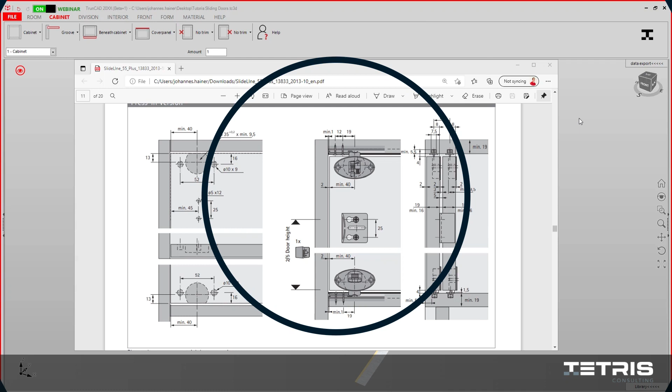Hello! In this tutorial we will create sliding door fittings for in-front mounting to use in TrunCAD.

Therefore, we go to Front, Sliding Door, and here to the Settings. Up in here, we enter our name.

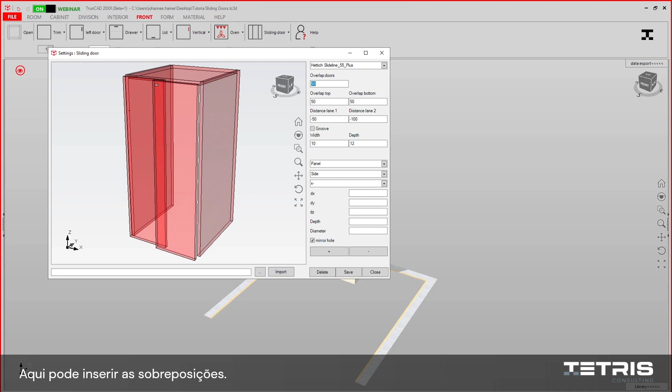Here you can set your middle overlap, overlap on the top and on the bottom. Here we have -4 on both of them.

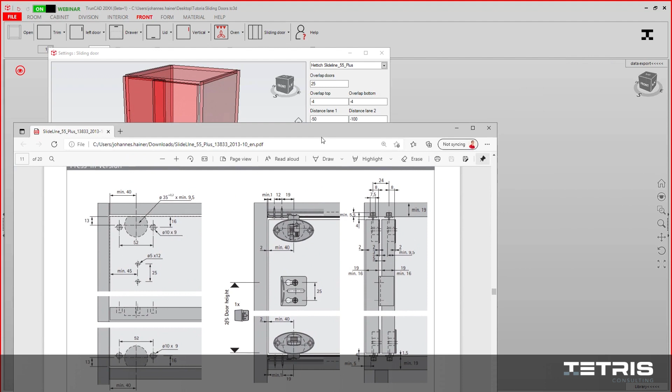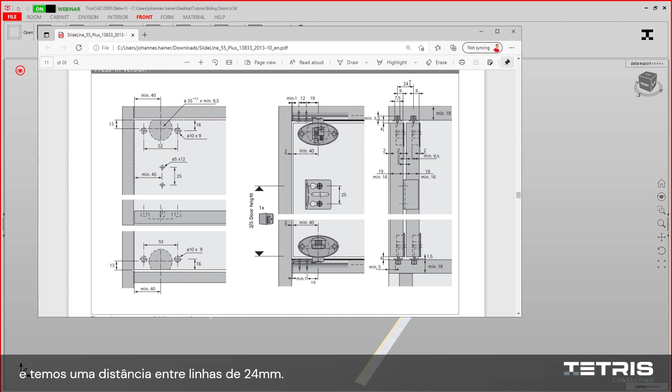Then we need the distances for the first and for the second lane. The first one has a distance of 5 mm, and we have a distance from one to the other lane of 24 mm. This means we have to enter 5 mm here and 29 mm here.

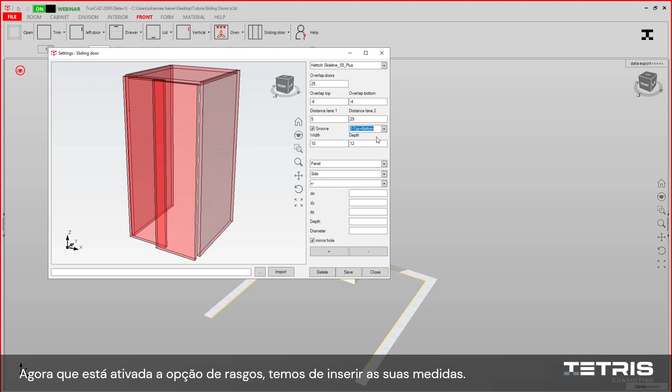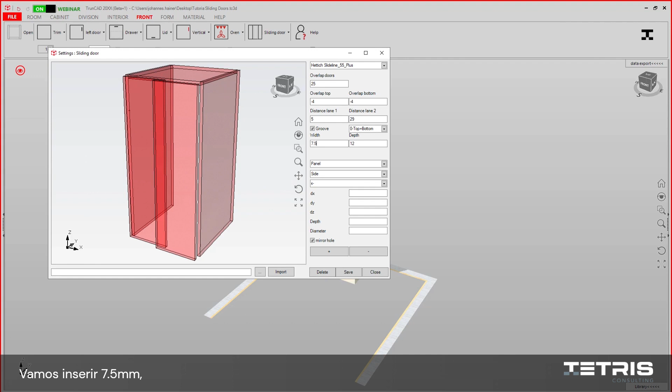Then we need to specify if we want grooves and where we want them. Now that we've activated our grooves, we need to set the measurements. Each groove has a width of 7.5 mm and a depth of minimal 5.5 mm. So we enter 7.5 and add a 0.2 mm clearance on the depth, which means 5.7 mm in depth, and then hit save.

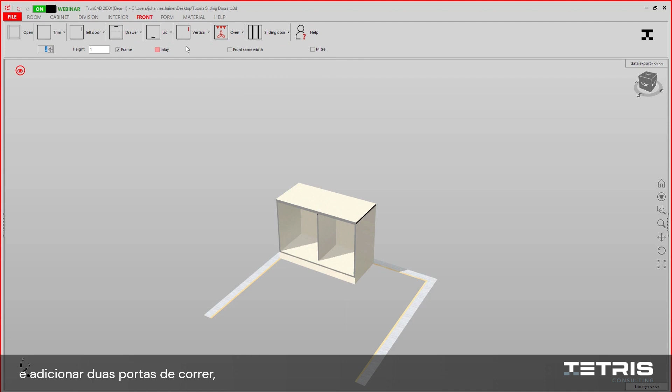If we now close it and add 2 sliding doors, we can now see that our grooves have been added.

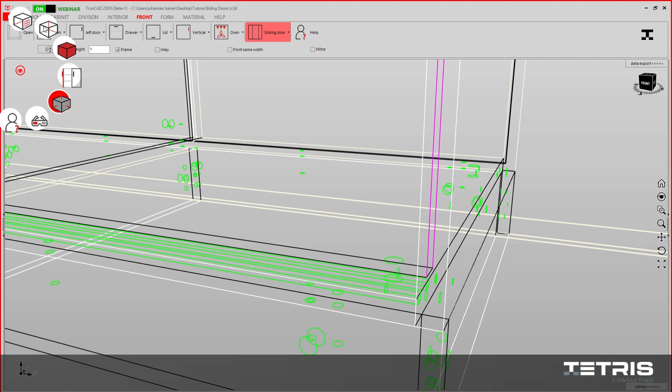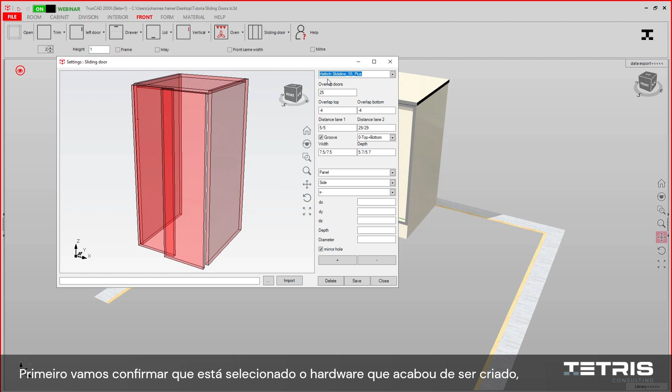Now let's get back to the boreholes. First we make sure to select the hardware we just created. Then we will take a look on the boreholes.

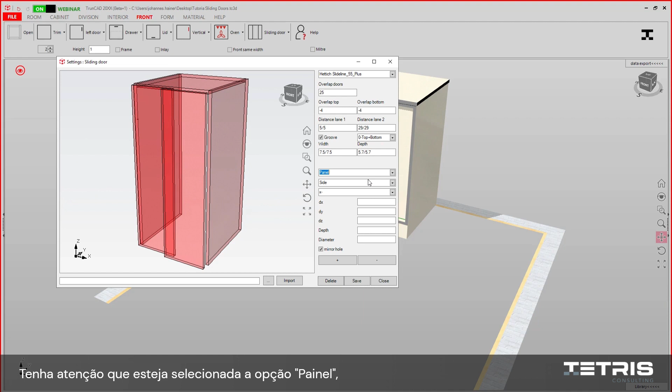For our first borehole, we need a distance in X direction of 40 mm, in Z direction of 13 mm. Make sure you have panel selected. Then we select a reference point here on the corner. Then set our Y direction and enter our distances. In X we had 40 mm, in Z 13 mm.

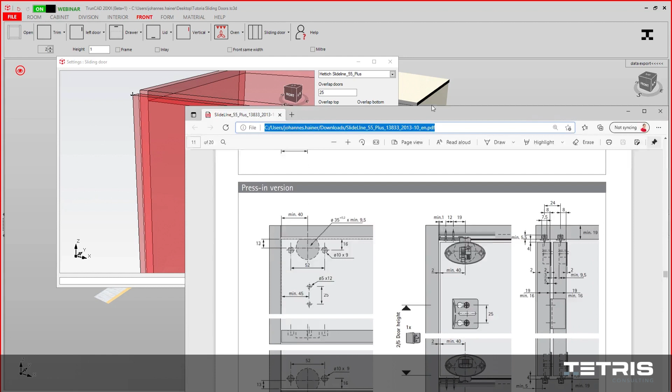Then this borehole is 35 mm in diameter and 9.5 mm in depth. Enter this here, 9.5. 35 millimeters. Also make sure mirror hole is checked.

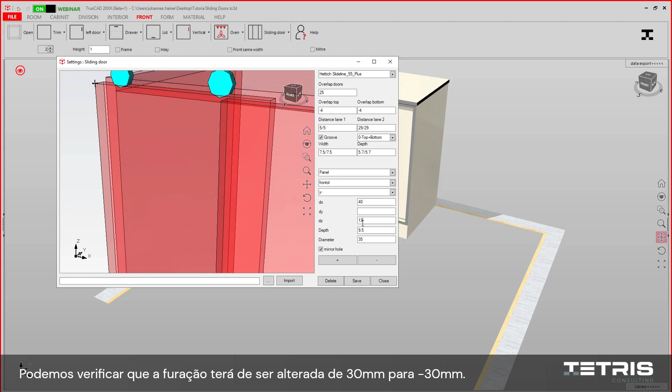Then we add this hole, and then we see this needs to be minus 13 millimeter and not plus 13 millimeters. So we select this, enter minus 13 millimeter, add these holes and get rid of the other ones.

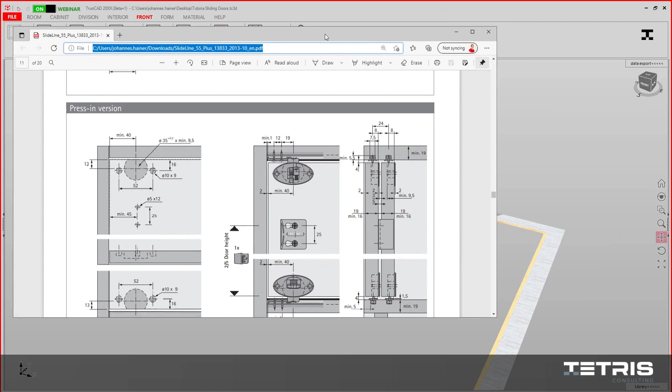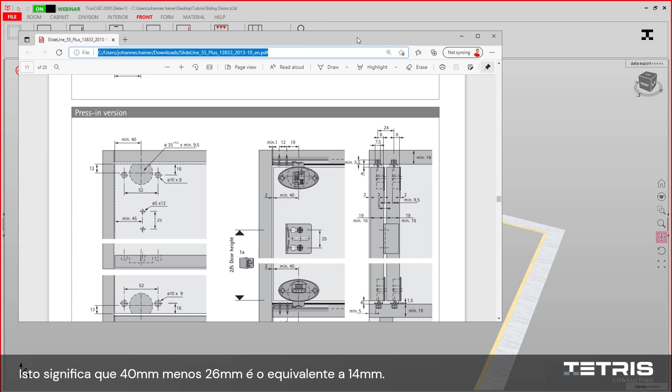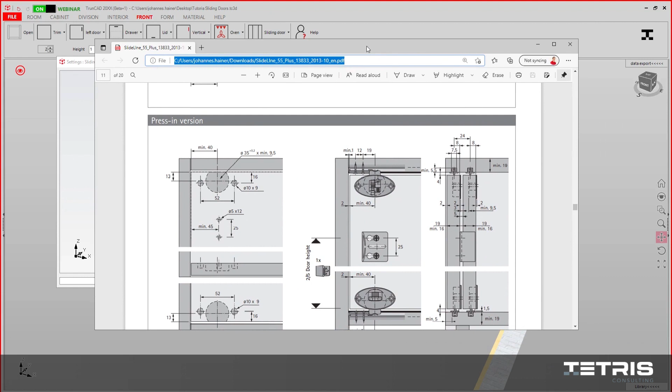Now the distance of these two holes is 52 millimeters and the position in Z is 16 millimeters. This means 40 millimeters minus 26 millimeters are 14 millimeters. So we enter our next hole at 14 millimeters in X direction, minus 16 millimeter in Z direction. Then we have a diameter of 10 millimeters and a depth of 9 millimeters.

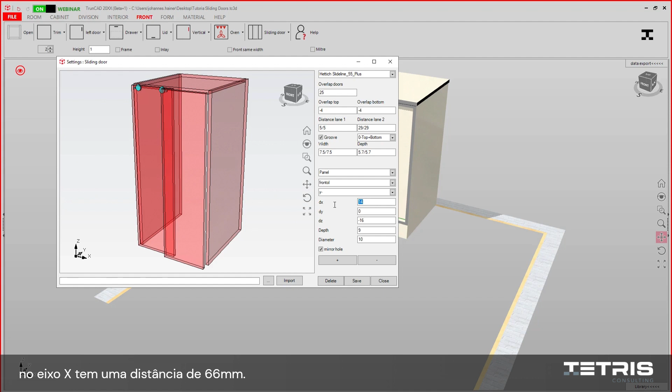Then we click plus. Our next hole is in X on 66 millimeters. And we click plus.

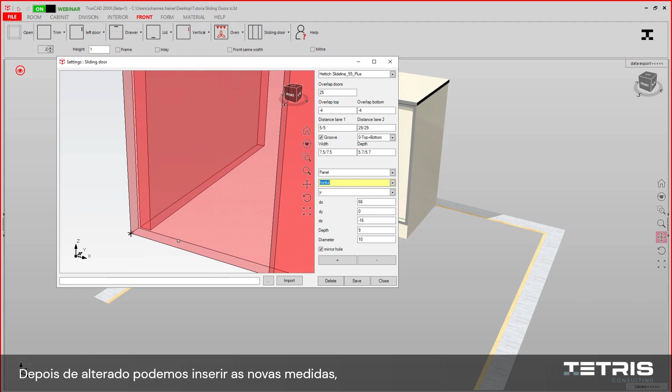And for the boreholes down here, we need to change our reference point. Now that we have a reference point here, we can change this to 16 millimeters, since we have the same distance on the bottom here.

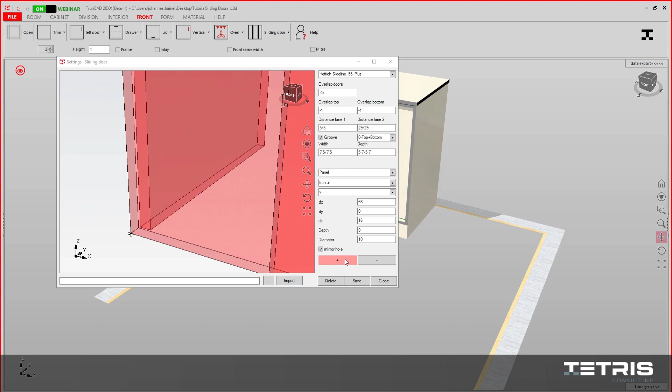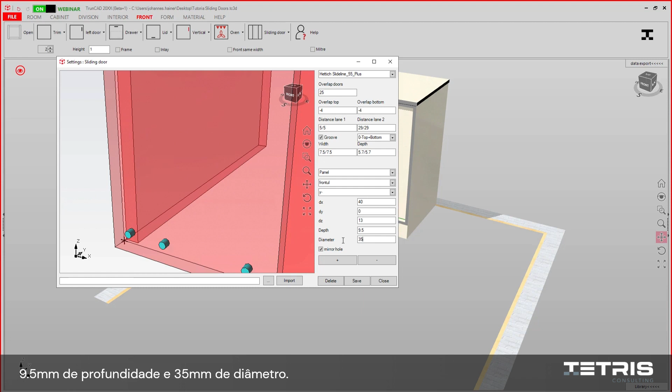Then add this one. Then go to 14 millimeters here. Add this other hole. Then change this to 40, 13 millimeters, 9.5 millimeters in depth, and 35 millimeters in diameter. And add this one.

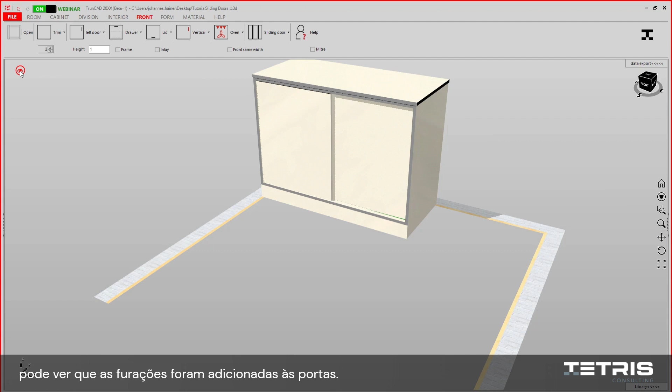Then hit save and close. If we now select the hardware again, we can now see that it has been added to our doors.

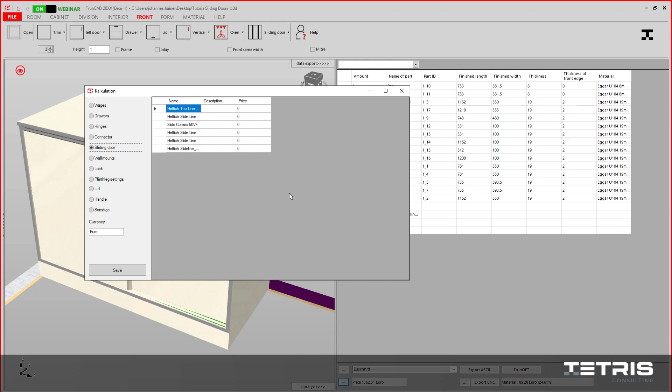As usual, you need to set your calculation settings for this. In here, then hit save, and you can use it in TrunCAD.

This was how to create sliding door fittings for in-front mount for the use in TrunCAD. Thank you for watching.